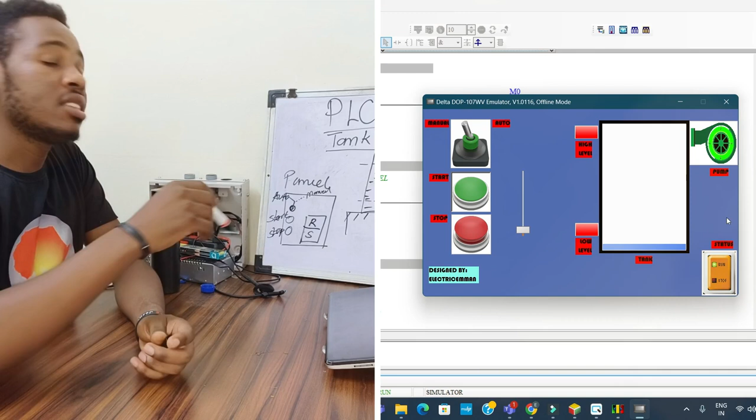Mode, or you can press and it goes to the manual mode. And then when it is in the manual mode, when you press start, this pump is supposed to be going on, and when you press stop, the pump is supposed to go off.

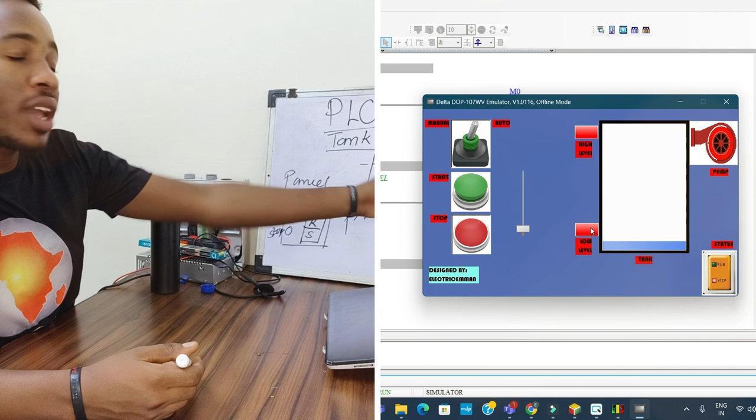Then in the other way around, we have it placed in the auto mode. When it is in the auto mode, now it is going to be controlled by this float switch. So this float switch is going to be having two levels of operation, the low level and the high level.

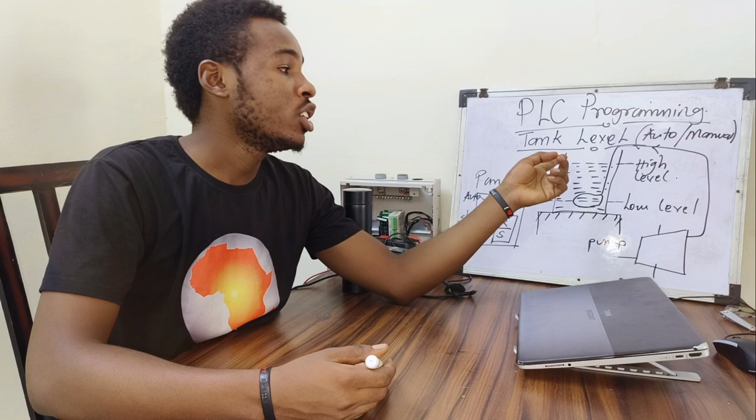When it reaches the low level, immediately this switch will also again get fired, but it won't trigger this pump to go off until it reaches the high level. So this high level is now going to command this pump to go off again.

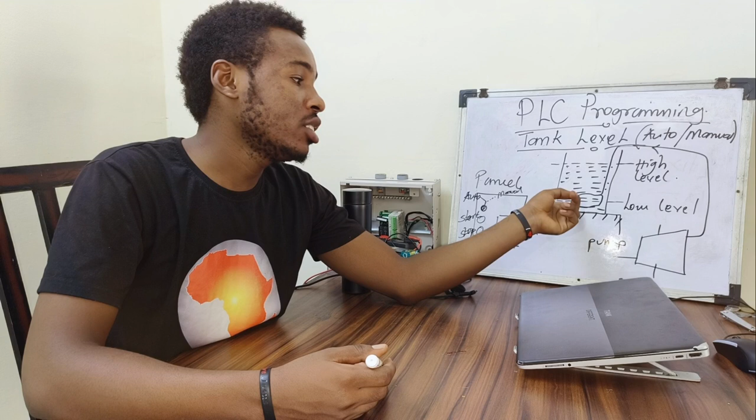And when the water is being drawn out of the tank, for some particular moment it passes this high level again, it gets fired, and then it cannot again command it to go on until it reaches this low level trigger area. So this is the project we are going to be performing using our PLC.

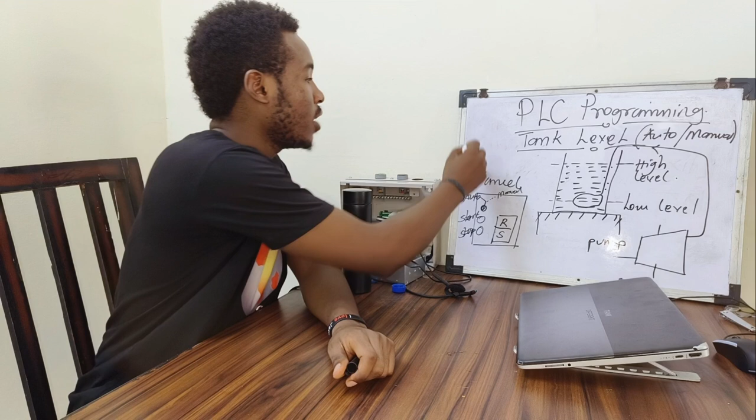So we are going to be having how many inputs? We are going to have one input for auto/manual selection. Then we have another input for start. We have another input for stop button. We have another input for low level. And then we have another input for high level.

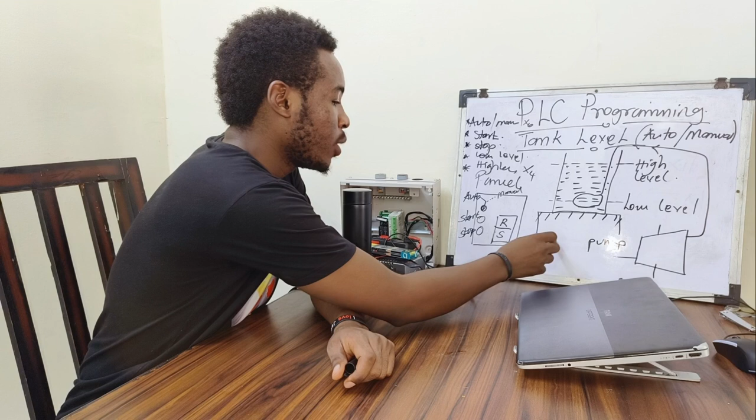So we have X0 up to X4: X0, X1, X2, X3, X4. Those are the 5 inputs we are having, and then we have only one output, Y0, for the pump. So I can also add Y1 for the running status, which is going to be showing me whether the pump is running or not. So this is the project you are going to have.

I've already done for you the simulation. I'm going to design the PLC ladder program, and then I take you through. So yes, guys, we are back into this programming platform. I will take you through the program very fast. As we mentioned, we are going to go to our comment list and we check our input devices.

Remember, I told you we are going to have one selector switch that can tell us if you are going to operate in manual or auto mode. Then we shall have the high level sensor and then the low level sensor. All this is performed by the float switch, or you can use level sensors. And then for the manual operation, we have the start and the stop button.

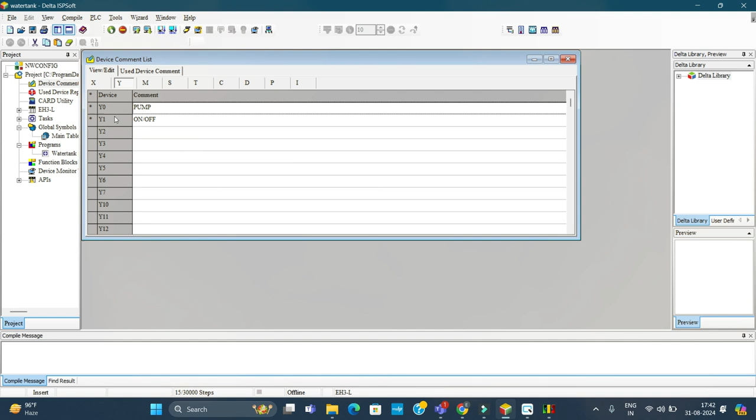And then for the outputs, we have the output relay of the pump. And then we can put the lighting if we want as well to show the status. So this is the program. In the program, I want to maximize it so that it can be visible.

In this program, I first programmed two controls: one control to give me the manual operation and one control to give me the automatic operation. So this is the selector switch of the manual and auto. I connected it in such a way that when it is not triggered, the manual operation is going to be connected to the normally closed button. And so when it is normally closed and it is not triggered, that means it will always accept power flow.

So if it always accepts power flow and the start button is created over here and connected in normally open, when it is fired, as well as this one is connected in normally closed, that means we can fire the internal relay. This is the internal relay of the PLC. It's not the output like the field output, but it is the internal relay.

So after having it here, you realize if someone presses the start and then they release it again, if we don't have this down part, it's gonna turn off the relay again, which we don't want. Since it is a push button that is just press and comes back by itself, we now have to offer latching. We have talked about latching in the previous video. If you have not known about latching, check in one of my previous videos. We did a video about latching itself. So this one, we raise this signal M01 to give us manual operation.

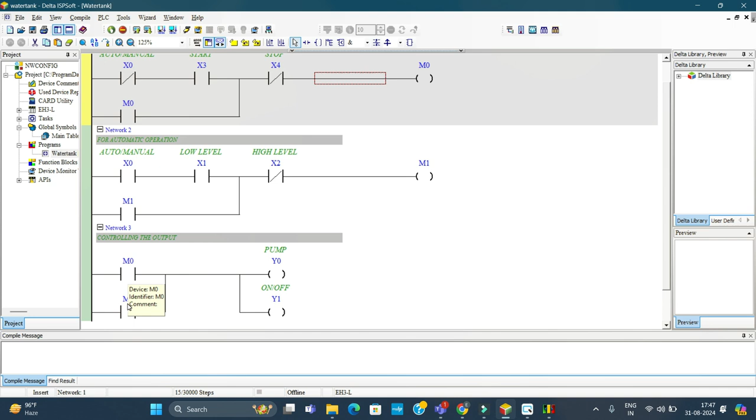The only time we are going to get zero here is when this one is zero and this one is zero. So when the automatic and the manual signals are not telling us that they need to be fired, we are not going to be having any output. So I compile this program. Once I'm done with compiling the program, I download it in the PLC.

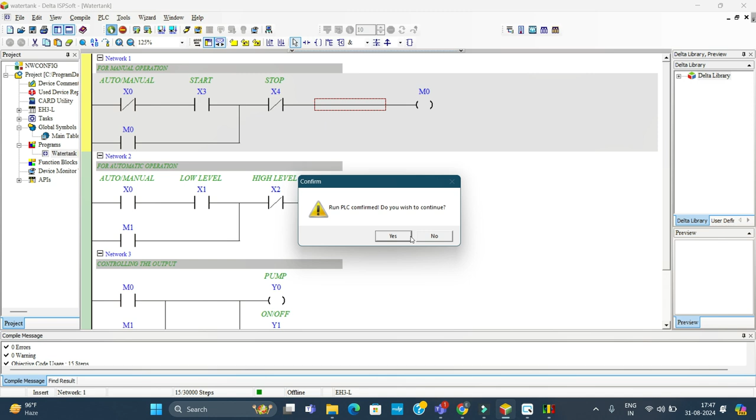Once downloaded in the PLC, I will just run my PLC, and then I go online. I set it over here to allow communication. So if you want to check our program, if it is already allowing power over here, that means it is in manual operation. So if I press the start button, the internal relay gets energized, and once it is energized, the pump is on and the indicator is on here. So this is how it's working.

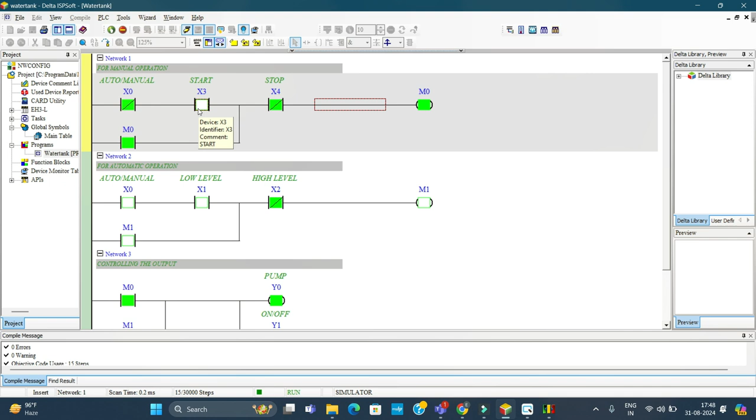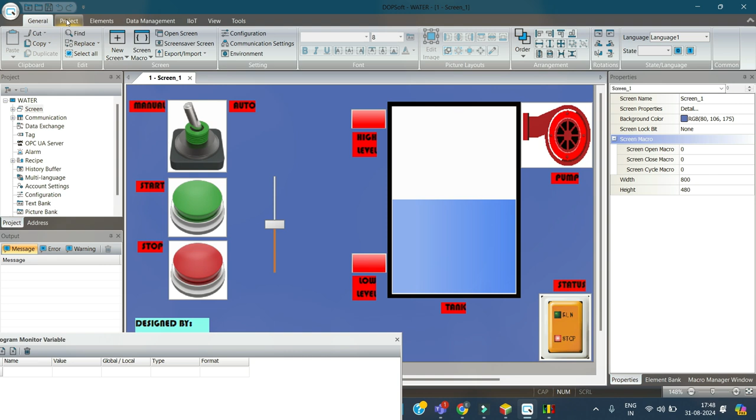Now, even if you turn it off, it won't turn off. Here you have to use the stop button to turn it off. So now, whenever I want to visualize it very well, I always design the HMI to make you understand properly. And this is my HMI. In my HMI, I'll just run this screen offline. And when I run this screen offline, this is what I was indicating.

Let me just explain a little bit how we want it to be operating. We want this system to operate in this way: when the water level is down here, in an automatic manner, this switch is supposed to be on. And when this switch is on, the pump has to be on as well. And when the water reaches this upper level, remember when it crosses this level, it will be off, and here it will be on. So this is how we want it to be operating. It should be indicating whether the pump is in run or stop mode. And here we shall be choosing auto or manual.

So realize, even if the water is increasing, as long as it is in manual mode, I have to turn on and off the pump using these buttons, not using the sensors. So even if this sensor is sensing water below the level, this sensor allows automatic operation only, so the pump will never go on. The pump can only go on when we are in manual mode and we are pressing start. The pump will be working and will be showing the run status. And when I press stop, it will stop instantly and show me that the pump has stopped.

But now I choose automatic operation. Now it is in automatic operation and the water reaches this lower level here, this switch will go on, and when this switch goes on, the water will increase the level, and once the water passes over this level, it will again go off, and the water will keep increasing. Realize the pump is running and it's indicating the signal over here, and when the water reaches here, this signal will get fired. When this signal gets fired, the pump goes off. So we start draining the water out of the system. As we are draining, going down, again the sensor will go off.

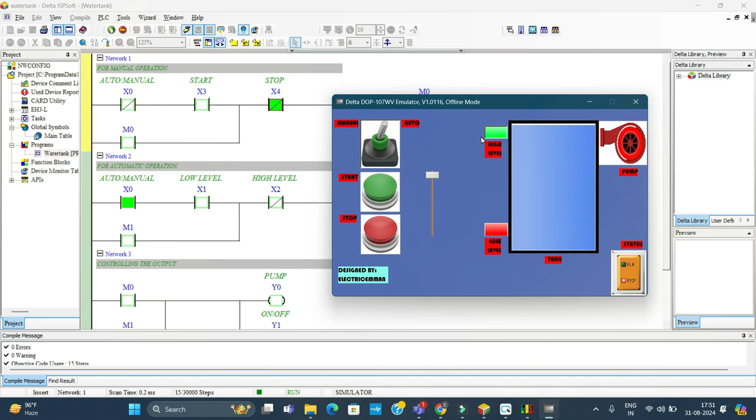And so when the water reaches up over here on this level, it energizes this switch. And when this switch gets energized, the pump will stop, and the motor will be indicating here it has stopped. So definitely, our system is working well. So you can issue it to a client, and that is our goal.